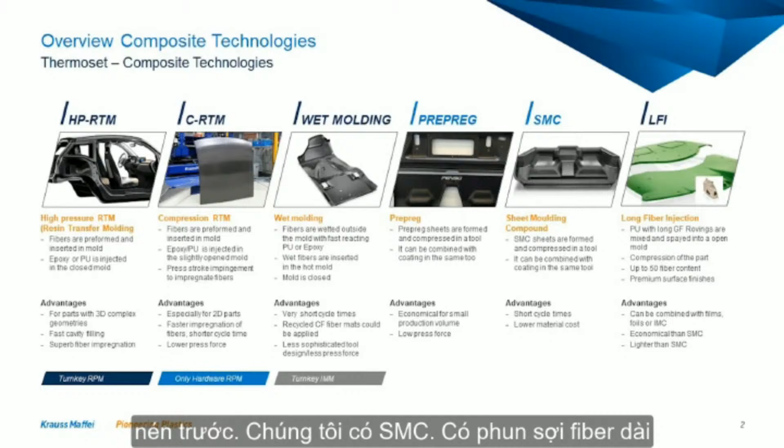We have pre-preg compression molding. We have SMC. We have long fiber injection, where we are pouring polyurethane with chopped long fibers into a mold and compressing it. We have structural composite spraying, where we are spraying polyurethane onto a sandwich honeycomb and compressing it.

We have reinforced reaction injection molding, DCPD, pultrusion for continuous production of composite profiles, pull winding, which is a combination of pultrusion and winding for additional side reinforcement, filament winding, for example for the production of hydrogen tanks. And then we also have some thermoplastic composite technologies: NYRIM, thermoplastic RTM, thermoplastic pultrusion.

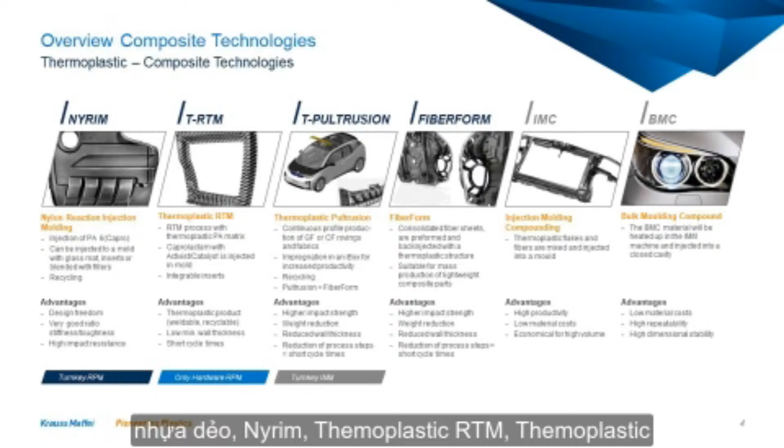FiberForm, which I want to introduce you to today, IMC, which is injection molding compounding, and last but not least, BMC.

Of course, today we are focusing on FiberForm, but whenever you have requirements or want more details about our other technologies, please get in contact with our colleagues in your region or directly contact me.

So coming to the technology FiberForm, how does it work? Basically, with FiberForm you always have an organosheet, which can be made of glass fiber, carbon fiber, or even natural fibers. You handle it and preheat the sheet very quickly in an infrared oven.

You preform it directly in the mold of the injection molding machine, and at the end you back-inject some ribs and structures to reinforce the sheet. Typical cycle times are 60 seconds.

Here you see some parts which we have already realized with our customers: for example bumper beams, airbag housings, entertainment holders, seat structures, and door panels.

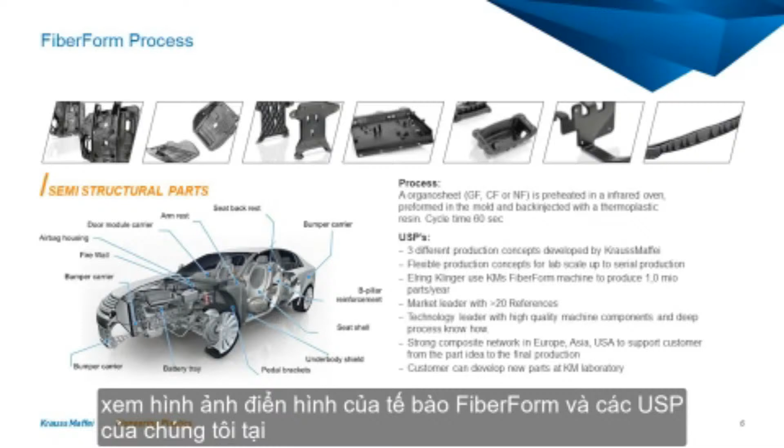Our USPs at KraussMaffei are that we offer 3 different production concepts, which means we are very flexible for small, medium, and large parts. We have already realized the one and only serial production plant with the customer Elring-Klinger, which is producing up to 1 million FiberForm parts per year. We are the market leader with more than 20 references with FiberForm.

We offer very deep process know-how, and we are also developing the technology to the next level internally. That means whenever you have a new inquiry, you can talk to us, we can guide you, we can recommend design guidelines, and you can even prototype some parts in our laboratory. We also have a very strong network in Europe, Asia, and the US to support customers in the region.

So going into the details, how does the FiberForm process work? Here you see in the first step we are picking up a pre-consolidated and pre-cut organosheet with a robot, which is handled by a robot and a gripper. We're moving the organosheet very quickly into an infrared oven, which is sitting on top of the injection molding machine.

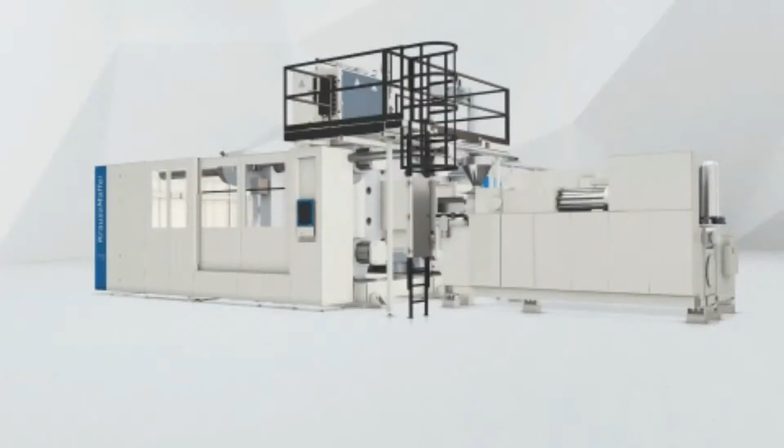I also have prepared a movie showing the complete process in an animation. So here you see the injection molding machine.

The two robots: one is handling the organosheet and is responsible for the demolding, the other one is responsible for placing the organosheet in the oven.

Here we have material carts, which are important for serial production. Here we have a centering station to hand over the organosheet from robot 1 to robot 2. And one of the key components, this is our infrared heating station.

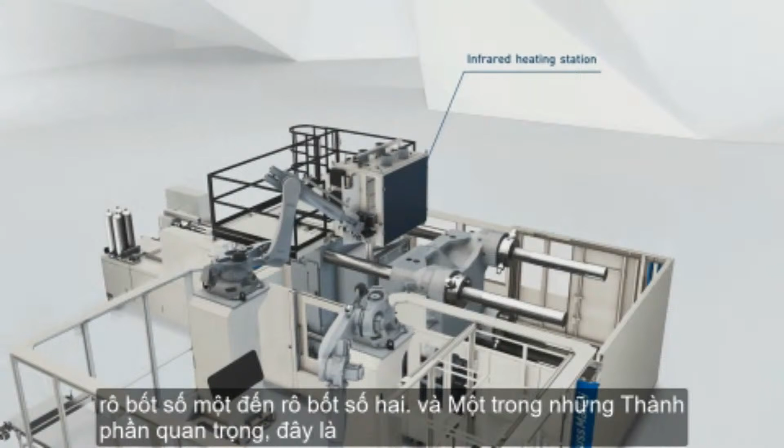Then we have a conveyor belt on the left and on the right side. One is for the quality assurance and one is for the finished part.

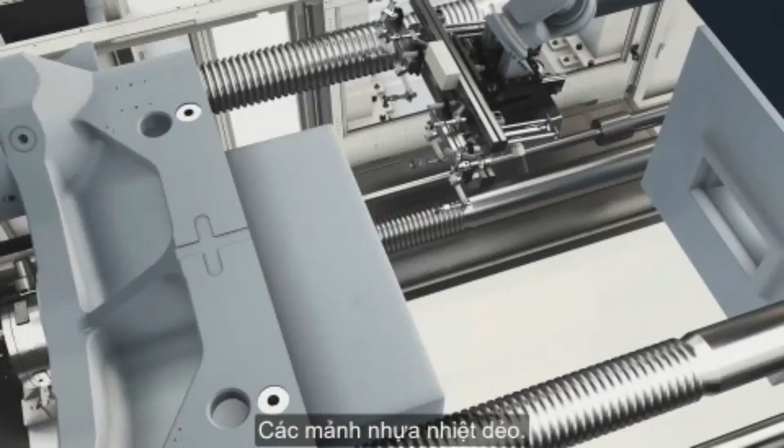Here we have our melting. When we go inside, you see how the screw is melting the thermoplastic flakes and back injecting them on the back of the organosheet.

Here we see the demolding of the finished part, and placing it on the conveyor belt.

Then the first robot is picking up the pre-consolidated, pre-cut organosheet, puts it on the centering station, and the second robot with the gripper is taking over this organosheet.

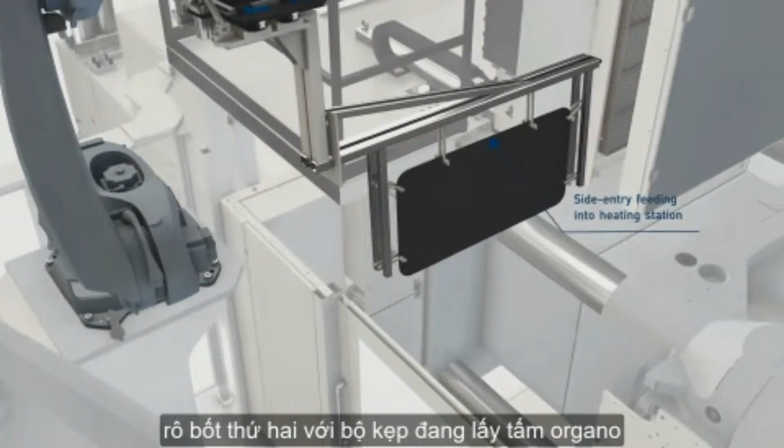It moves inside the infrared heating station where we are really accurate, heating up every section of the organosheet. We are measuring the temperatures and directly heating them to get equal temperature distribution.

Then we very quickly position the preheated organosheet in the mold, close it, and back inject. At the same time, the heating station moves backwards for easy removal of the part.

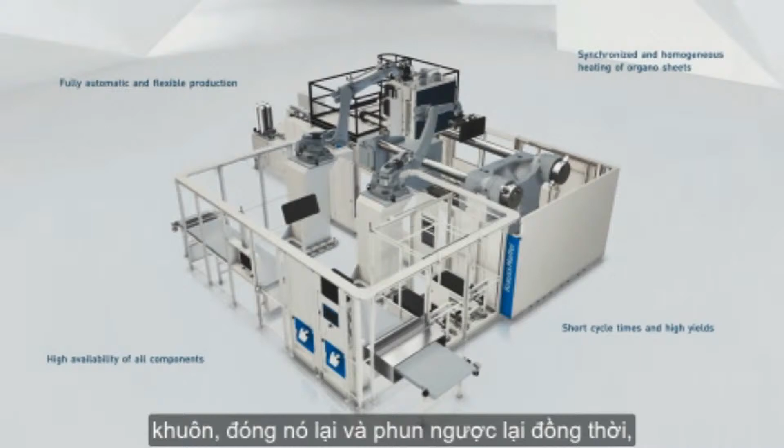This is our fiber form process. The same line we also have in our laboratory in Munich, so whenever you have the possibility to visit us, feel free to come and see it in our lab.

So this was the general fiber form technology, but there is also a much wider technology portfolio. I was introducing you to fiber form with an organosheet, either with glass or carbon fiber. This is the standard, but you can also do it with natural fibers.

This is especially important if customers want to get better insulation, so not only a reinforced part, but also better insulation. Most customers use it for door panels, for example.

Then you can use a special visible carbon fiber sheet. This is important when you want to produce interior or exterior parts with a very nice surface quality.

Then if you want to reduce the waste and also play with different thicknesses and different fiber orientations, instead of an organosheet, you can use a tape laying process in advance to combine it with our fiber form process.

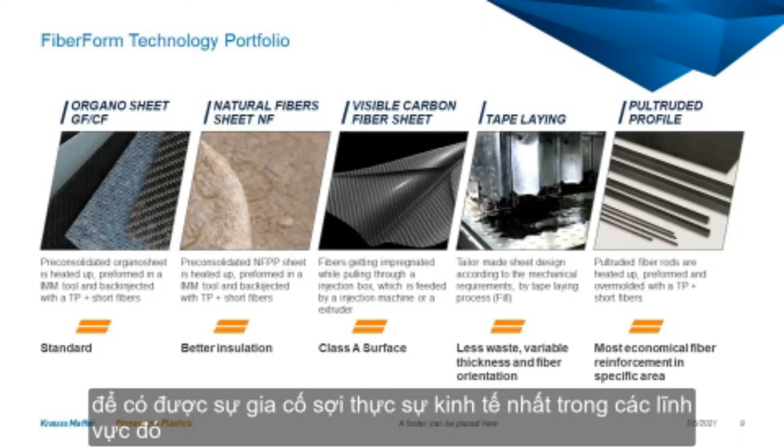So this is the complete technology overview with 5 different possibilities, and we have the chance to support you in all 5 areas with our competences and know-how, but also in combination with our partners.

I want to touch a little bit on the key component of the infrared heating station, because in the infrared oven we have different zones, and with a standard control you can't ensure that all the temperature zones are reaching the same temperature at the same time.

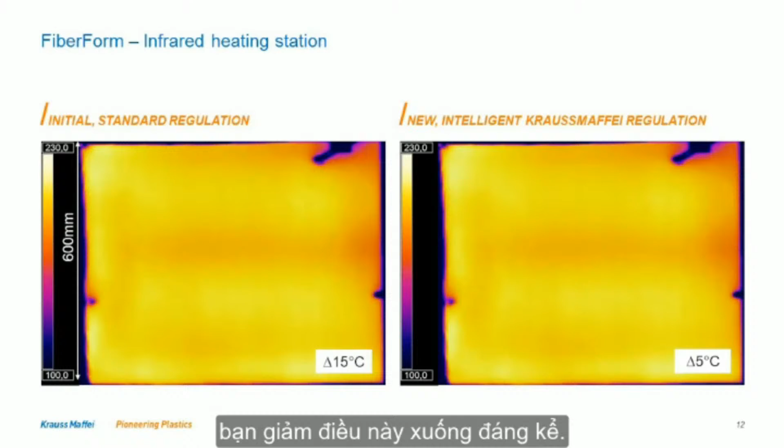You see it here with a standard regulation, you have a delta of up to 15 degrees, which definitely leads to quality issues. But with the new intelligent KraussMaffei regulation, you drop this dramatically down. You have just a tolerance or delta of 5 degrees Celsius, to ensure a really high quality and repeatable process.

What are our USPs or value propositions for the customer? Compared to competitors on the market, we have increased efficiency. Why? Because with our heating system, we are 1 to 2 seconds faster. And as I mentioned before, every second means one additional part.

We have higher flexibility because our infrared heating station can move back and forward to ensure very easy demolding of the part. And we're also getting feedback from the market that our fiberform system has higher performance.

Why? Because the infrared heating station is directly fixed on the injection molding machine, on the fixed plate, and this enables us to save an additional 3 to 5 seconds, so additional parts.

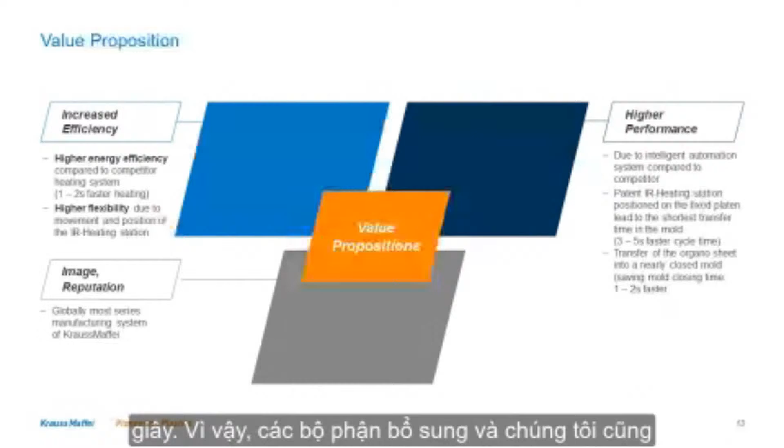And we also move the injection molding platens while we are heating the organosheet, very quickly and very close together, to have a short distance while handling the sheet into the mold, saving another 1 to 2 seconds.

Last but not least, as I mentioned on my second slide, we are the global leader in this technology, with the highest reputation, and with the one and only customer which has a real serial production.

What are we offering for this technology? Now I want to touch on our product portfolio. Basically, we are offering 8 different types of injection molding machines, electrical and hydraulic, up to a clamping force of 5,500 tons.

We are offering all the periphery required for the fiberform process, which you can also retrofit to an existing injection molding machine. This includes the infrared oven, for example, or a special hardened plastification, which enables you to use short reinforced fibers for the back injection.

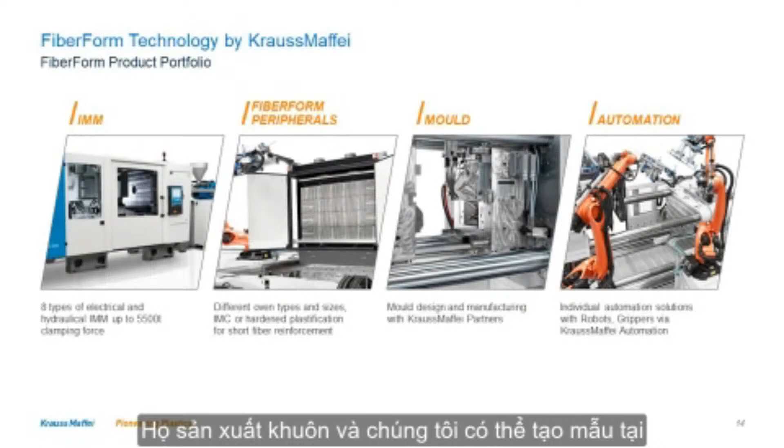At KraussMaffei, we also have a subsidiary in Germany, in Viersen, where we offer complete post-processing, so milling, trimming, punching.

Quality control is part of the automation and also post-processing, to ensure that the complete process parameters are recorded, saved on a QR code, and printed on a label which you can attach to the part.

Then also trials in our laboratory to test different materials, different organosheets, and last but not least, our strong network with material partners and also tooling partners.

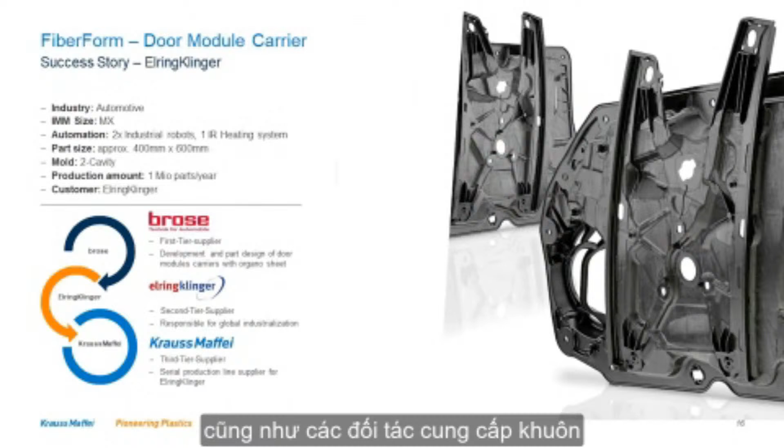At the end, I also want to give you an insight into our largest customer in this technology, ElringKlinger. They bought many machines in the world and installed them worldwide.

They have an MX injection molding machine with 2 robots and 1 infrared heating station. They are producing door panels with 2 cavities on 1 machine, with an amount of 1 million parts per year. I have prepared a special movie which gives you direct feedback from our customer.

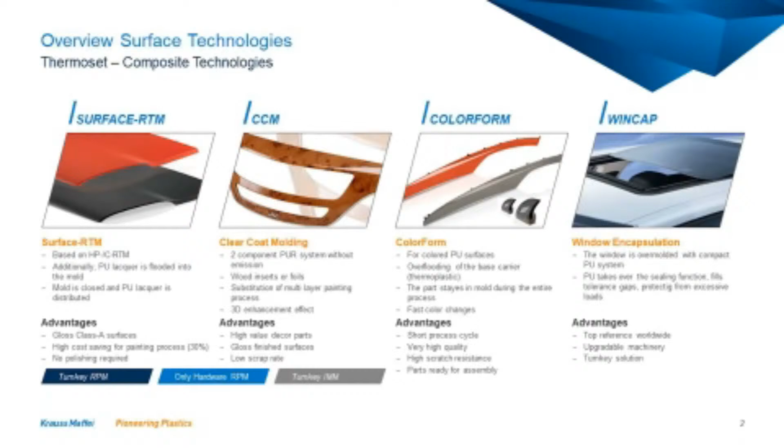There is surface RTM, where we are overmolding a structural RTM part directly in the mold with a coating. There is CCM, which stands for clear coat molding, where we are overmolding a substrate in a second process. It can be real wood, it can be a carbon fiber foil, it can be even metal.

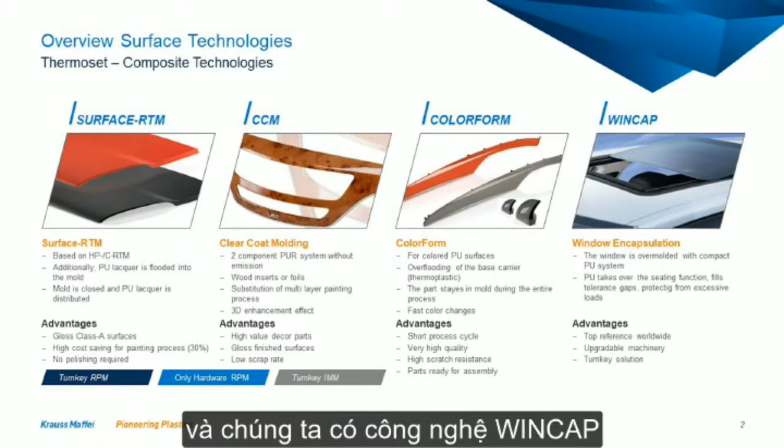Then we have ColorForm, which I will introduce to you later on. And we have the technology WinCap, which stands for window encapsulation, where we are injecting a polyurethane sealing, for example, for panorama roofs.

ColorForm. How does the technology work? So basically, as you know, KraussMaffei has many different divisions.

We have know-how in injection molding machinery, we have know-how in reaction process machinery, and a lot of know-how in automation. And the starting point for the development of the ColorForm technology was because we have so many divisions under one roof.

We were bringing these three divisions together and establishing a completely new development, which combines an injection molding machine with a polyurethane machine and automation around it. The result is a complete ColorForm production cell for serial production.

How does it work? So basically, you always produce a thermoplastic substrate on an injection molding machine, and you overmold it on the same injection molding machine with a colored or a clear polyurethane or polyurea coating.

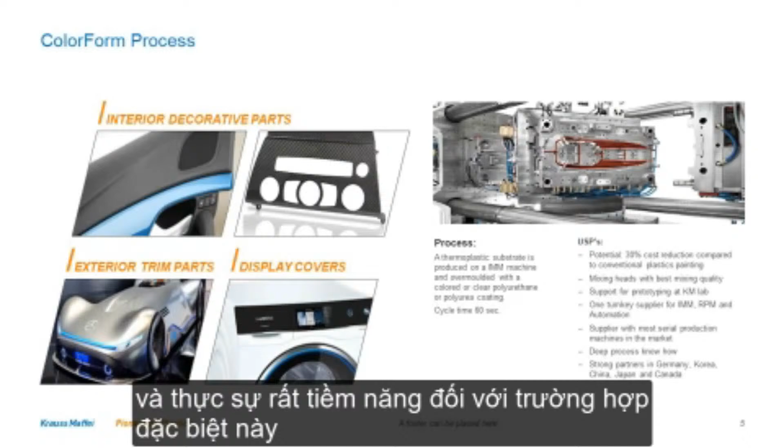Here I want to introduce you to the movie of our strongest customer, the company Weidplas, where you see they are using a tilting platen.

We are now injecting in the first step the thermoplastic substrate. Here you see the mixing head, which is mounted directly to the tool.

We are turning the tool to create a bigger cavity. Now we are building up the pressure of the metering and mixing machine and injecting the coating. And in parallel, we are producing a new substrate.

Once the process is finished, we are demolding the finished part and placing it on a buffer station.

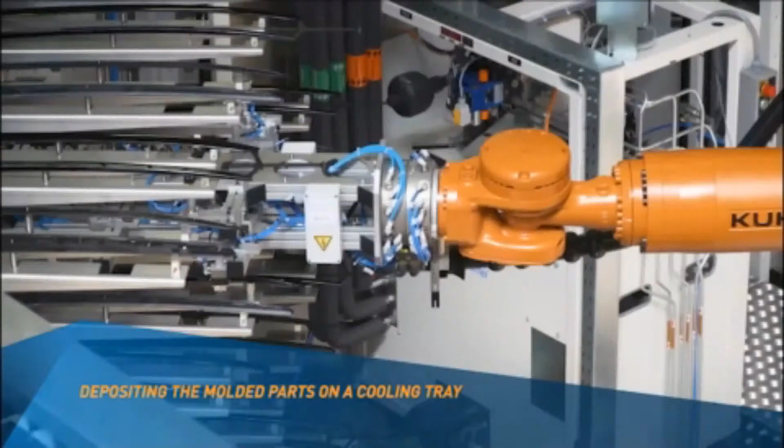This allows the parts to cool down. And the same robot with the grippers takes parts which already have the right temperature, and then we start the complete post-processing.

This means cutting off the injection gate, placing it on a post-processing cell, where we trim the contours.

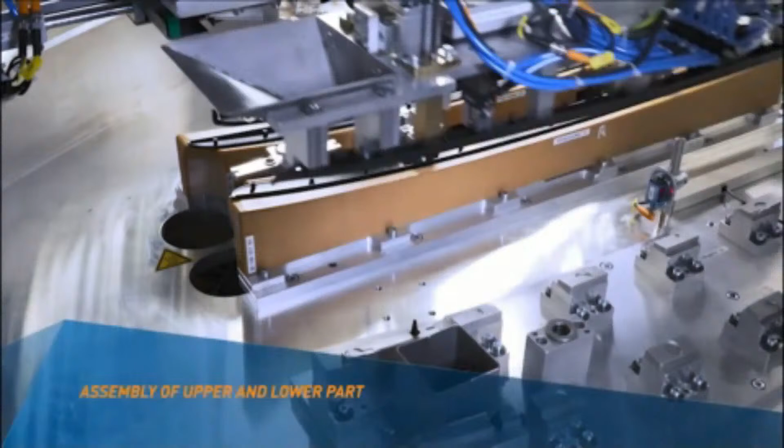We assemble the upper and the lower part together, move to the next station, where we are joining the two parts with an ultrasonic welding process.

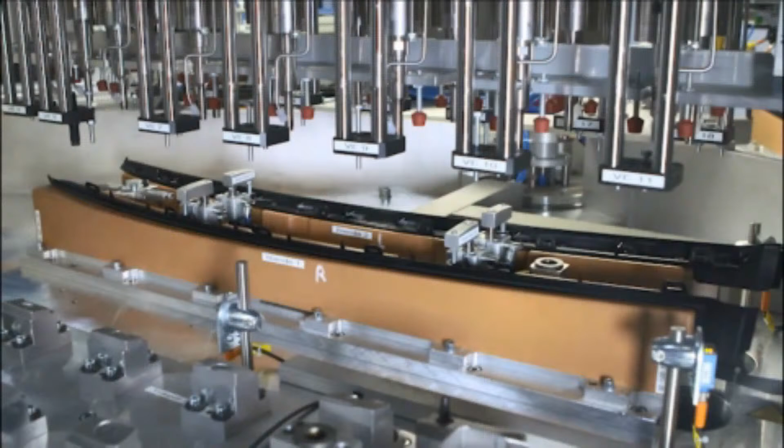Then we are demolding the part and placing it on the conveyor belt.

So there are different possibilities for how to change the cavities. There is the sliding table, where you can slide the tool from the left to the right side. There is a turntable, and there is a swiveling platen, what you have seen in the movie.

So all three variations are possible. For all of them, we have advantages and disadvantages. For example, if you want to retrofit your existing machine, this could be a solution with the sliding table. If you want to start a completely new process, we would recommend a turntable or a swiveling platen, because here we have shorter cycle times and a smaller space.

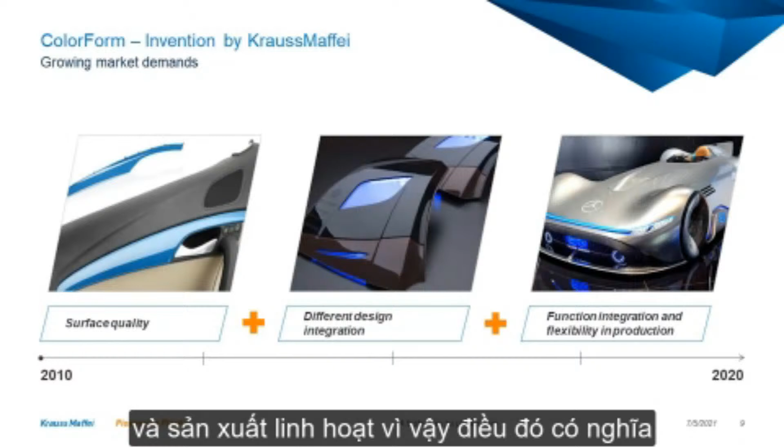That means they want to change from color to color. They want to integrate films. They want to be very flexible, and they want to have a high degree of automation.

Here we are seeing the growing market trends. At the beginning, most customers were looking for cost reduction, so less process steps, shorter cycle times. Then the process grew and developed over the years, and later on, customers were looking for excellent part properties. That means a high gloss surface, or adjustable surface properties, where you have, for example, two colors in one part, or different surface finishes, and also surface design elements directly integrated in a part.

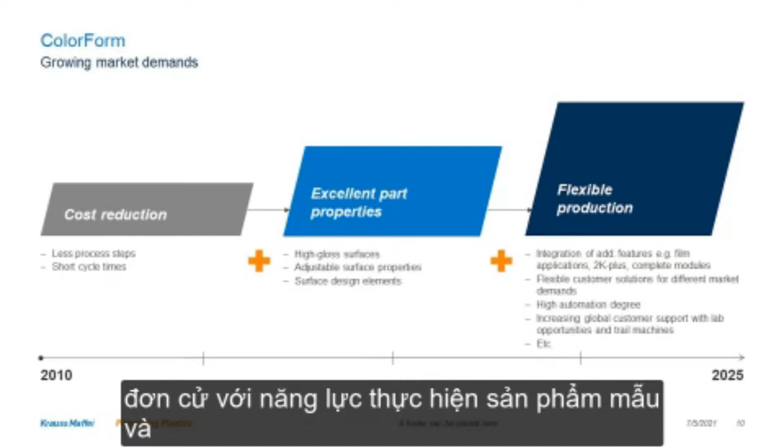Now, once the process is really on a mass production level, and a lot of OEMs are looking for producers, the customers are asking for more flexible production. That means they want to integrate additional features, for example films or foils. They also want a flexible production solution in regards to a high automation degree, and they want strong support in the region, for example with prototyping capability and trial machines.

What are our unique selling points or value propositions for you? Basically, a reduction of production costs, which I will show you on a later slide. You have less process steps, less transportation costs, less packaging, no overspray, and shorter cycle times.

On the other side, you have excellent part properties. You have a really high gloss finish. You can adjust the hardness of the surface. You can even produce parts which are self-healing after getting a scratch. You can integrate, for example, different haptics, and you have no orange peel effect.

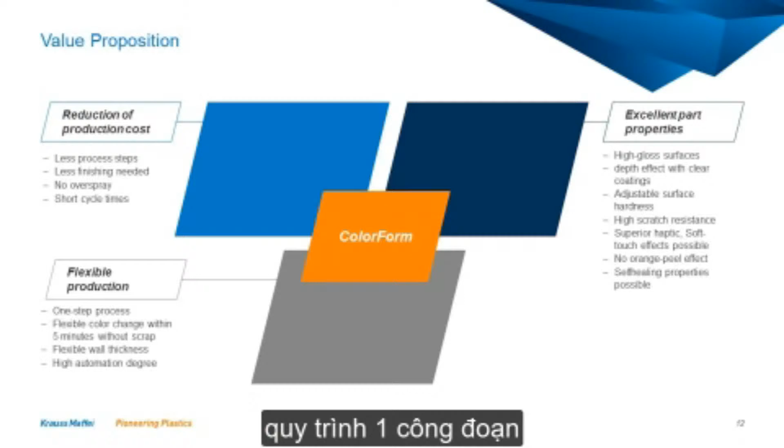Last but not least, we are offering flexible production solutions. It's a one-step process where you have a flexible color change within 5 minutes. We are flexible with different wall thicknesses, and as I mentioned several times, we have customized and high degree of automation possibilities.

I want to touch the comparison between the new ColorForm process and the traditional painting process. Here on top, you see all the different process steps required to produce one injection molding part: quality check, packaging, transportation. Then you do a very complicated coating process with primering. The primer has to dry, you apply the lacquer, flash off, lacquer drying, quality check, then transport it, do the quality check again, and assemble the final part.

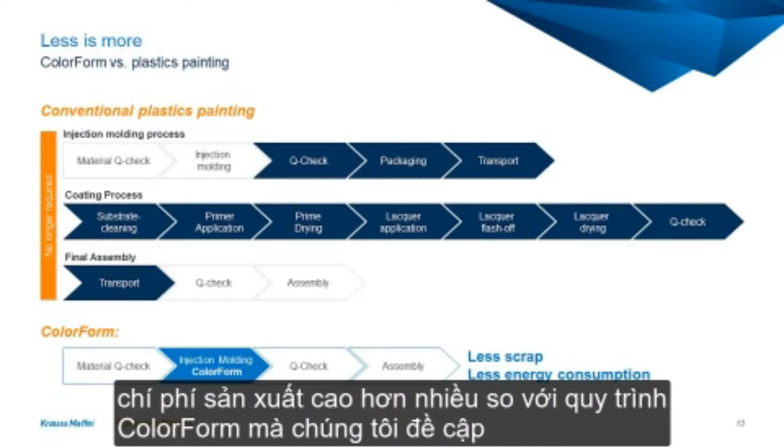So many process steps, which makes the end product much more expensive. With the ColorForm process, in total you have a little bit higher material costs, but when you look at the complete production chain, you have up to 30% lower production costs because of less scrap, less energy consumption, and less process steps.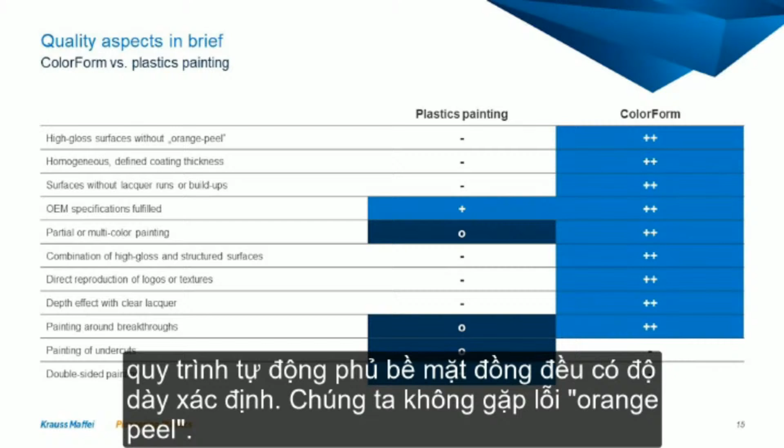When we're looking at the quality aspects between ColorForm and a normal painting process, you see ColorForm has much more advantages compared to a traditional painting process. For example, we automatically have homogeneous defined coating, no orange peel, and the possibility to very easily integrate different haptics, different structures, different colors, and different effects. But on the other side, we also have two disadvantages: we can't paint undercuts, and also can't do coating on both sides. When you combine everything together, you see there are much more advantages compared to the traditional painting process.

What we are offering in the product portfolio: there are 8 different types of injection molding machines, electrical and hydraulical, up to 5,500 ton. We offer customized metering machines, since there are different types of coatings and every coating supplier requires a customized machine. Then on the mold side, we work with partners who are able to design and build the mold for you. We even recommend and give you some mold guidelines on how to redesign your part so that it's feasible for the ColorForm process.

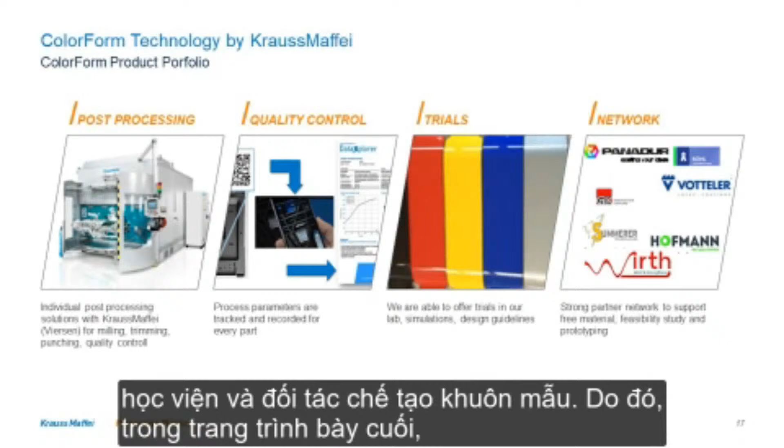When we are speaking about quality control, all the process parameters are recorded and stored, with the possibility to print it on the parts. Also for this technology, we have the possibility to realize material trials or prototyping trials in our lab, but also at partner labs. And we have built up in the last 10 years a very strong partner network with material partners and also institutes and tooling partners.

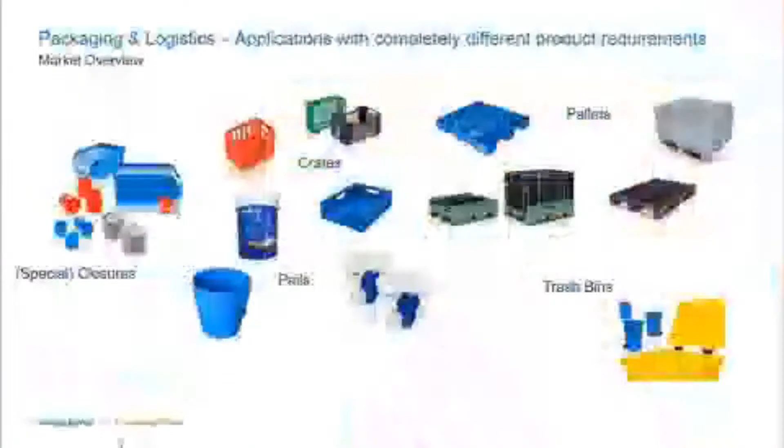Also welcome from my side. My name is Michael Schreier. I'm the application owner for packaging and logistics, and I will be happy to show you our solutions for this industry in the next slides. Now I would like to start to show you an application overview about packaging and logistics applications.

As it is a wide range between large pallets and small closures, the requirements to the machines are completely different. KraussMaffei can offer you solutions for the following fields, which I will present afterwards in detail. Pallets and trash bins, where many customers already use a high portion of recycled materials. We have the right solutions for you.

Then crates and pails is also a specific field where we can offer you very interesting and efficient system solutions together with automation. And the third field is special closures and packaging parts, where we have sustainable solutions with our all-electric machine. So you see, we have the right solution for you.

So starting now with pallets and large containers, where you can see now an impressive solution for the production of 1,100 liter trash bins. This project was realized on our MX 5500, that means a clamping size of 5,500 ton, together with 2 injection units, each 74,000.

Furthermore, the system was completed by our in-house automation system, a linear robot of 1,000 for the demolding of the big trash bins. So especially for trash bin applications, which are usually characterized by large mold sizes and heavy shot weights, as well as intensive use of recycled materials, we have with our MX series the right solution for you.

So this hydro mechanical 2-plate machine is available up to 6,000 ton clamping size and large injection units up to SP 134,000, as well as multi-inject solutions, that means 2 injection units, which perfectly covers large packaging applications like pallets or trash bins. Beside the basic machine, our machines are well focused on such applications.

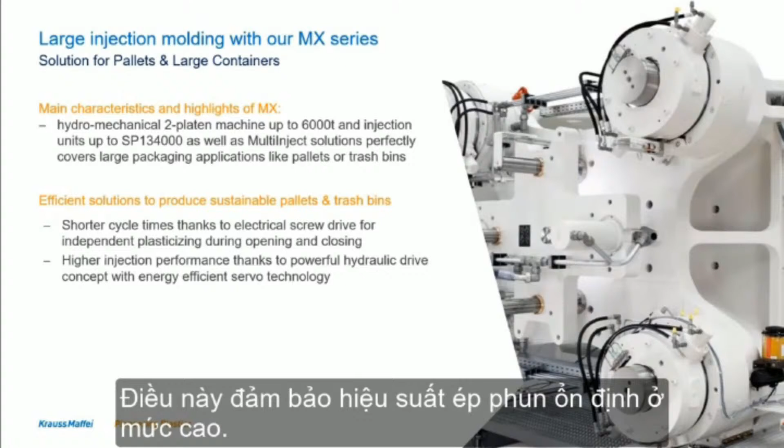That means you achieve shorter cycle times thanks to an electrical screw drive for independent plasticizing during opening and closing. But also you can benefit from higher injection performance thanks to our powerful hydraulic drive concept with energy efficient servo technology. This ensures a constant high injection performance. Important for you is also the superior melt quality, which you get through our HPS barrier screws, which are especially designed for logistics applications made of HDPE or PP with low MFIs, especially for recycling materials.

Coming now to the next application field, crates and pails. Here you can see a very impressive system solution for a 2-cavity 19-liter pail application running on our GX machine with a clamping size of 1,100 ton and an SP injection unit of 12,000.

Together with our partner Campetella for an in-mold labeling application done by a side entry solution.

This application has also been done with the background of circular economy. So you see the cycle here. We produced on our GX the pail application, and afterwards the pails get back to the circle. That means we recompounded it on our blue power solution, which also comes from KraussMaffei.

Afterwards, this material could be used again to produce an A-pillar lining on our electrical machine. So you can see KraussMaffei is your reliable system partner for injection molding technology, but also for extrusion technology. So we can close the loop, and we are the right partner for more sustainability. That means circular economy. Now coming to the machine technology.

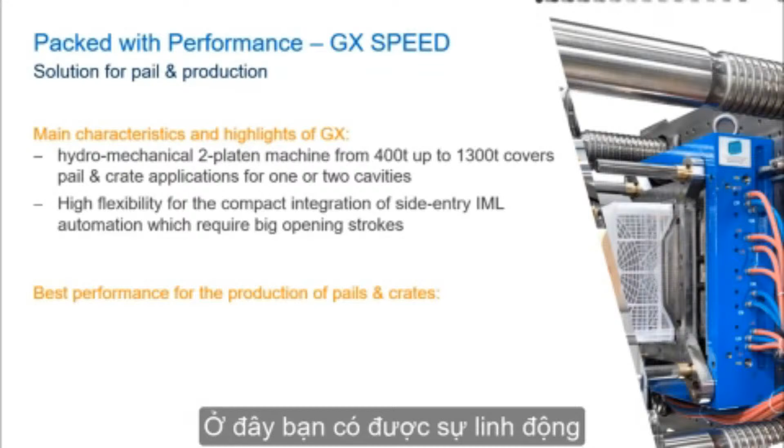With our GX Speed, that means packed with performance. This hydromechanical two-plate machine is available from 400 ton up to 1,300 ton, and therefore covers pail and crate applications for one, but also for two cavities. You have a very high flexibility for the compact integration of side entry IML, that means in-mold labeling automation, which usually requires big opening strokes. Here you get the flexibility. That machine fits very well for that kind of applications.

Furthermore, the machine is equipped to achieve shorter cycle times, thanks to electrical screw drive for independent plasticizing during opening and closing, but also because of increased clamping movements with our GX Speed option, especially for big open strokes, as usual for pail applications.

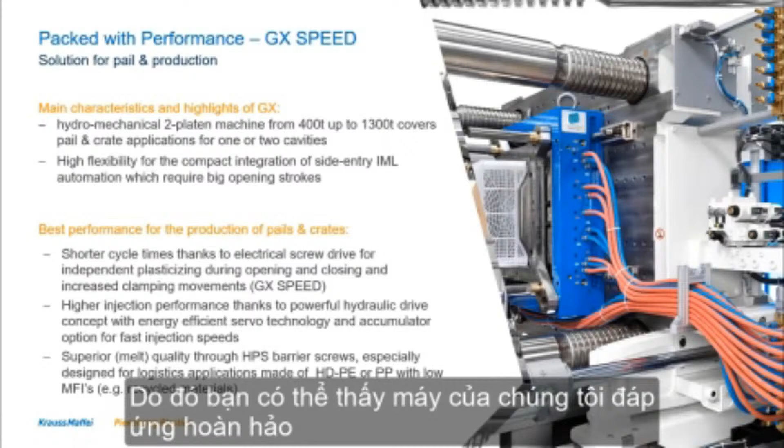For such applications, of course, it's important to get a higher injection performance. This you can get thanks to our powerful hydraulic drive concept with energy efficient servo technology, and in addition, the accumulator option for fast injection speeds. But also quality is important. So superior melt quality you can get with our HPS barrier screw. This is especially designed for logistics applications made of HDPE or PP with low MFIs and also recycled materials. So you see, the machine fits perfectly for that kind of applications.

And this I want to demonstrate now in two videos. So now I want to start with the first video, where I would like to demonstrate high-speed pail production. Here our GX 650 ton with an injection unit of 8,100 runs a 10-liter pail application with two cavities.

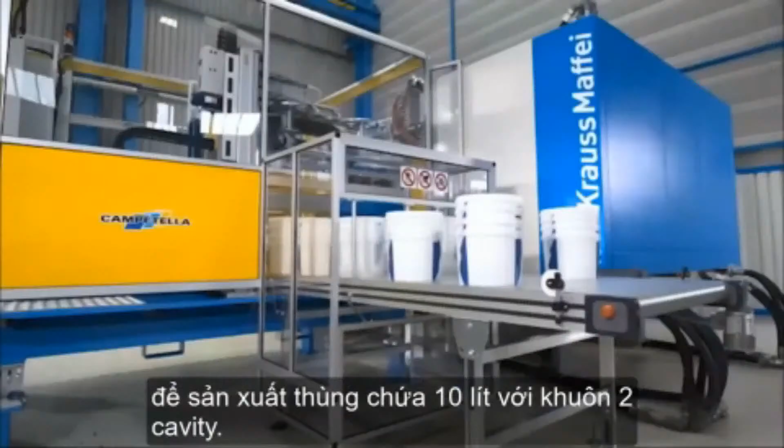Due to the compact two-plate design, you benefit from a high productivity per square meter. Our HPS barrier screw is especially designed for logistics and packaging applications and ensures highest plasticizing rates.

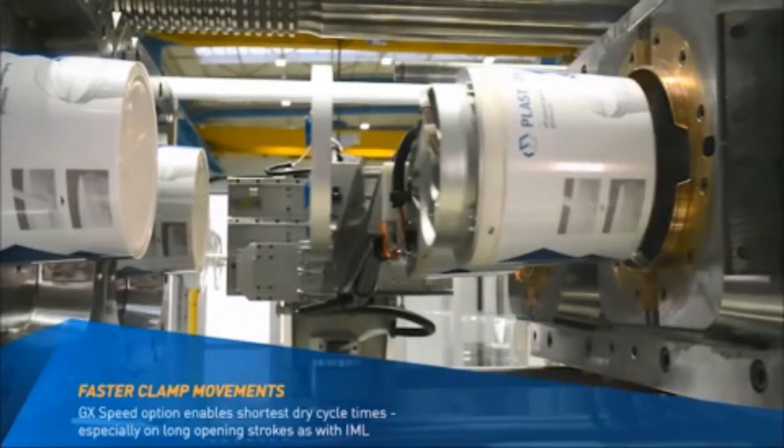To achieve fastest cycle times, this machine is equipped with parallel functions like an electrical screw drive, and to reach high injection speeds, you benefit from a powerful injection unit with accumulator. Additionally, the speed option increases the clamp movements, especially on long opening strokes as with in-mold labeling.

The precise and high-speed handling of the labels is perfectly done by Campetella's side entry robot solution. Now you can see the full in-mold labeling process. That means picking the labels, inserting it to the mold, demolding, as well as recharging the labels. This ensures a continuous process.

And now I want to show you a second application, showing again packed with performance. In this case, the efficient production of rigid crates. Usually such returnable crates require fast cycle times, but also a high product quality because the returnable crates shall be used many cycles.

This machine is prepared for fast cycle times again. The 2 kilogram shot rate requires a high injection performance, but also the HPS barrier screw ensures high plasticizing rates and is perfectly designed for the typical materials HDPE and PP, which are used for such applications. The machine design allows the easy discharge of free-falling parts. This makes the system very price attractive.

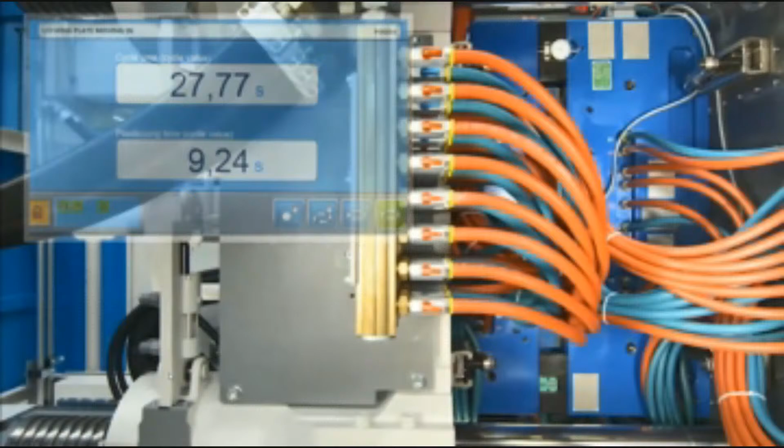Furthermore, you can see a perfect arrangement of the cooling water distribution. Here we have the right solutions for you.

So now coming to the smaller applications within packaging and logistics. And here I want to show you our solutions for special closures and packaging. As you can see, the variety is very high in special closures, a wide range of different applications. But what are the application requirements? Specific functions need to be integrated in an attractive haptic and visual design.

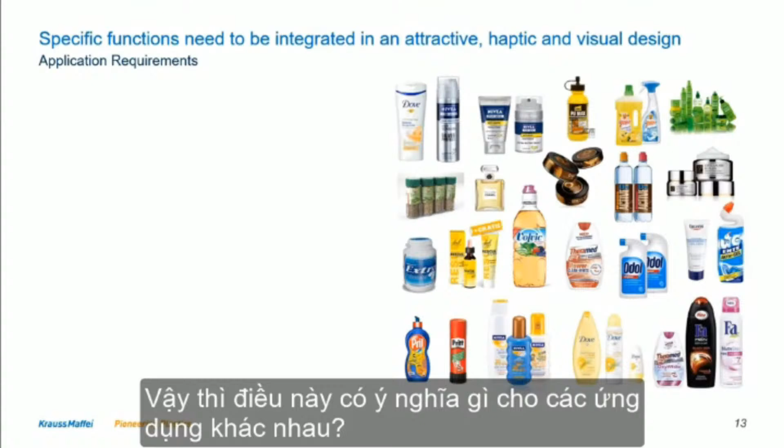So what does it mean for the different applications? It means design trends like convenience formats, like flip tops, spout caps, or dosing in food industry. But it also means premium designs in cosmetics industry to have a unique design. Or in the pharmaceutical industry, for example, here tamper-proof closures are required.

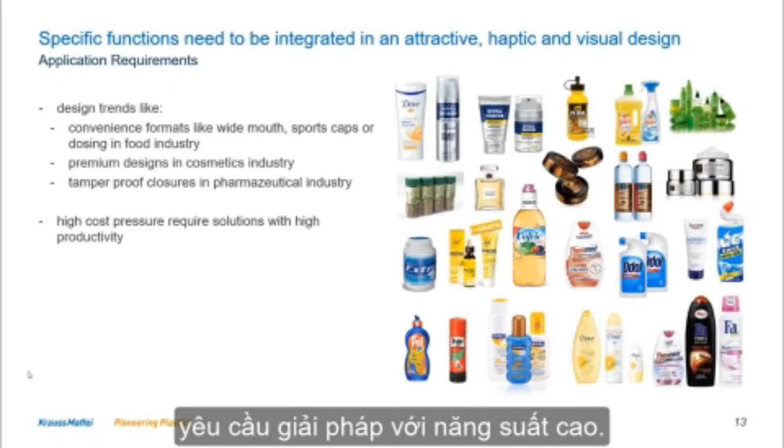And all of these different requirements need to be translated into a machine or production solution. What else is important for you as a producer? For sure, packaging parts require a high, or usually have a high, cost pressure, so that means it requires solutions with high productivity. Therefore, the cavities or the molds are usually multi-cavity molds, starting from 4 cavities up to 32 cavities. What else is required?

Multi-component and color requirements are for sure a special requirement to the machine, but we have the right solution for you. I want to show you this in the next slides.

First, I want to show you the flexible production of special closures with our GX machine. This machine you saw already for crates and pails, but it also fits very well to specific closure applications, because of the very compact design and the 2-platen clamping unit, which has the big advantage that you have flexibility for all technologies, especially cube molding or multi-component technology, but also the availability of a wide-platen option, which is necessary to run multi-cavity molds, as usual for special closures. With focus on closure and packaging applications, the big advantage is the increased output you can get with cube mold technology.

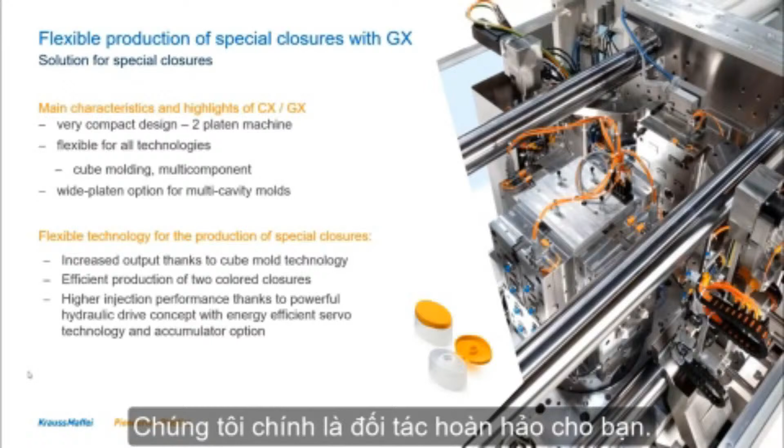There is also the possibility to run two-colored closures with the multi-component solution. For high injection performance, you can benefit from a powerful hydraulic drive concept with energy-efficient servo technology and, if necessary, an accumulator option. On the picture you can see a reference application - a cube mold application for an 8-cavity special closure mold. Here we are the right technology partner for you.

Coming to sustainable production of closures and packaging, here we can offer you our all-electric machines, available as an electrical 5-point toggle clamping unit from 25 ton up to 400 ton clamping force. Of course, the biggest advantage is the high efficiency thanks to low energy consumption. The price-performance ratio of these machines is very attractive. Please check your inquiry and your closure - we will be happy to make an offer to you.

Our all-electric machines have optimum performance for the production of special closures, thanks to short cycle times because of quick clamping movements and increased injection speeds. It fits very well to that kind of application.

Now I want to show you another demonstration of how we produced flip-top closures on our all-electric machine. This was a 160-ton machine producing a 60-cavity mold for flip-top closures.

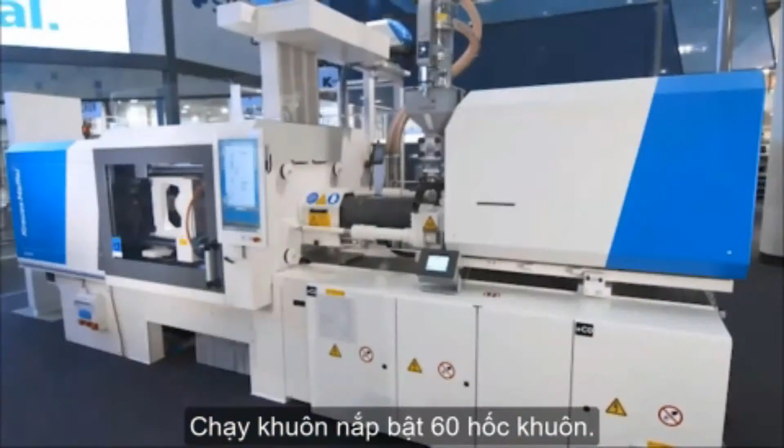The performance and enlarged platen for multi-cavity molds are optimal for special closures. The electric drives keep the energy consumption low - this also means more sustainability in packaging.

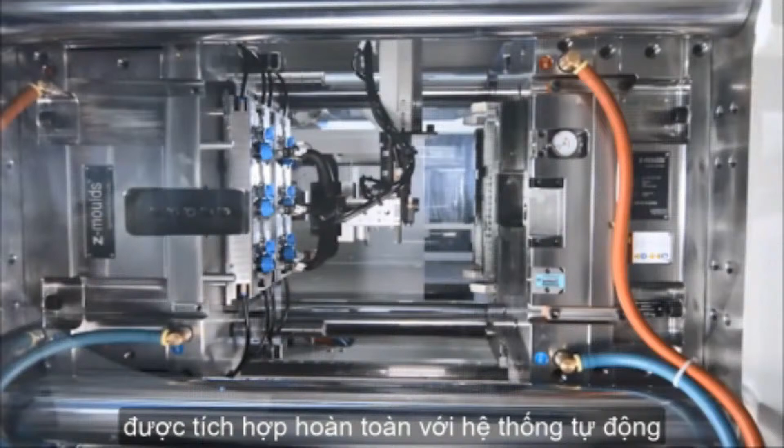Here you can see how the closures get demolded, and the special thing is that the fully integrated automation system by KraussMaffei closes the closures within that process. The controls are very user-friendly - you can easily operate the machine.

So this was a short overview about our impressive solutions for packaging and logistics. Thank you for your attention.

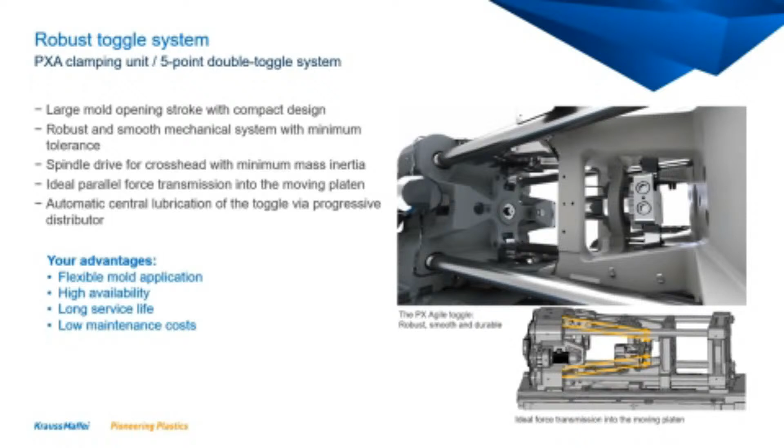Nói đến thiết kế tuyệt vời cho phép sử dụng khuôn tự do cao. Tấm quán khuôn được mở rộng theo tiêu chuẩn để sử dụng khuôn phổ biến, hỗ trợ các di chuyển trên các thanh dẫn linear có độ song song chính xác của khuôn ở mọi vị trí. Dẫn hướng tuyến tính, giảm tổn thất ma sát lên đến 80% so với hướng dẫn trượt.

Khi nói đến khuôn, ta phải đề cập đến phạm vi mở rộng của chiều cao khuôn. Phạm vi điều chỉnh lớn để sử dụng linh hoạt các khuôn có chiều cao lắp đặt lớn hoặc nhỏ. Điều chỉnh độ cao khuôn tự động thông qua bảng điều khiển để thiết lập nhanh chóng. Tự động điều chỉnh lực kẹp với tùy chọn cảm biến cho độ chính xác cộng trừ 2%. Ưu điểm có được tính linh hoạt cao cho các chiều cao khuôn khác nhau. Thời gian thiết lập ngắn và độ tin cậy của quy trình cao.

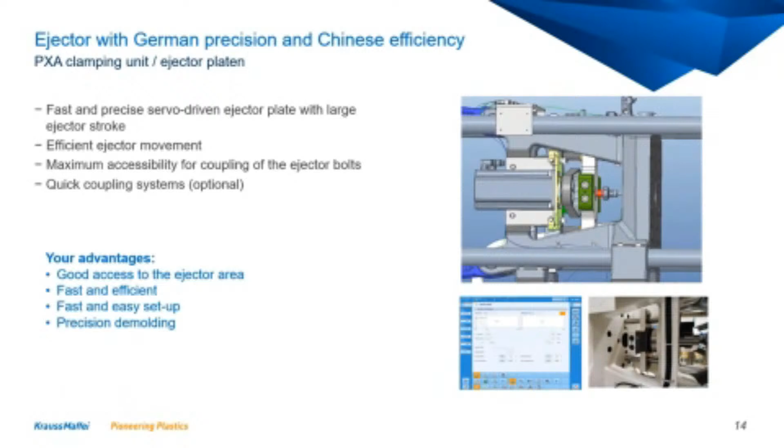Ngoài ra, khi nhu cầu máy cho các khuôn có yêu cầu mở rộng linh hoạt với các chức năng, khi đó máy có thể nâng cấp thêm bộ nguồn thủy lực độc lập. Với bộ nguồn thủy lực độc lập, có thể cung cấp cho 4 bộ cascade, 3 bộ core puller. Ngoài ra có thêm van giảm áp, kiểm soát nhiệt độ dầu, van nước. Có ổ cắm HAN 32E. Với bộ nguồn thủy lực độc lập có sẵn 3 loại: 10 lít trên phút, 20 lít trên phút và 40 lít trên phút.

Mọi tích hợp trong điều khiển máy thông qua điều khiển điện. Bộ nguồn thủy lực được đặt ngay trong gầm máy sẽ không chiếm diện tích của máy. Về ưu điểm, không chiếm diện tích của máy, sử dụng linh hoạt cho nhiều loại khuôn khác nhau. Giao tiếp toàn bộ với bộ điều khiển MC Agile.

Tiếp sau đây chúng ta sẽ tìm hiểu bộ phận chính thứ hai của máy ép nhựa là bộ phận phun keo.

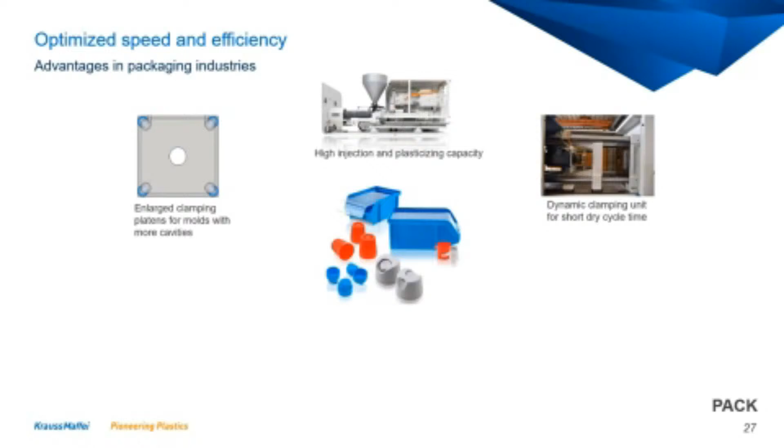Bộ phận kẹp động cho thời gian chu kỳ khô ngắn. Chúng ta có thêm phần điều khiển APC plus, trọng lượng phun keo được tối ưu hóa. Tiếp đến là việc trục vít hiệu suất cao.

Ngoài ra, nhiều giải pháp tự động hóa kết nối với hệ thống bên ngoài, tiêu thụ năng lượng và nước thấp, không gian rộng rãi bên dưới bộ kẹp khuôn.

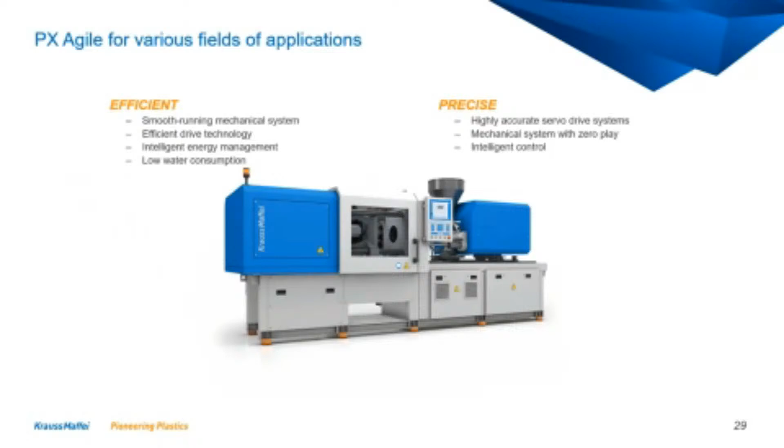Tính sẵn dùng, hệ thống cơ khí mạnh mẽ, công nghệ truyền động chính xác, setup và thiết lập và khởi động nhanh, chi phí bảo trì thấp.

Về công thái học, chiều cao làm việc thoải mái, mọi thứ ở nơi nó phải ở, khả năng tiếp cận tốt.

Nói đến độ sạch, công nghệ truyền động không khí thải. Về mặt dễ lau chùi, khu vực sản phẩm thì không có dầu nhớt bôi trơn.

Và điểm cuối cùng là yếu tố sản xuất. Trục truyền động mạnh mẽ, truyền động trục song song, thời gian chu kỳ cycle ngắn.

Với dòng máy PX Agile, sự cân nhắc về một khoản đầu tư hợp lý với chất lượng, hỗ trợ nhiều ứng dụng linh hoạt và đa dạng. Đó là một sự lựa chọn tốt cho quý khách hàng hiện tại và trong tương lai.

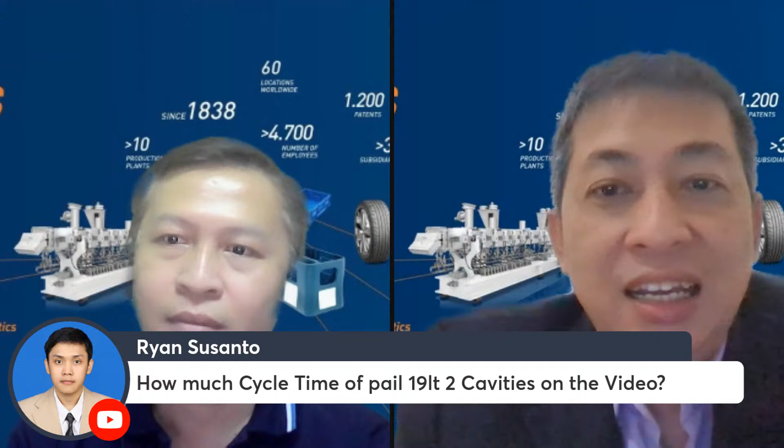Ở đây có một câu hỏi về cycle time cho cái thùng sơn 19 lít chạy 2 cavity trên máy của KraussMaffei.

Sorry, Mr. Ryan Susanto. We thank you very much for your question, and we already provide information for your question. Is you asking about the cycle time for 2 cavity in mold labeling for the pail? So the cycle time is approximately 10 seconds. So if you need further information from us, please send email to us, and we are very happy to receive your question and inquiry for this application. Thank you very much.